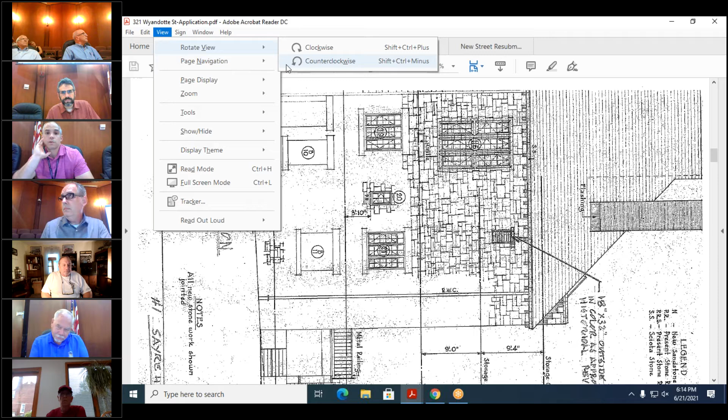Kelly, if you could switch to the architectural drawing. Here we see a drawing of that same location. The arrow points to an opening that does not exist; that is the proposed suggestion. If you notice, that's within the existing stone wall where there is currently no opening. I would request the applicant explore the possibility of locating the louver around the corner. You can see in this drawing, the north elevation, there's a window set around the corner on that same level.

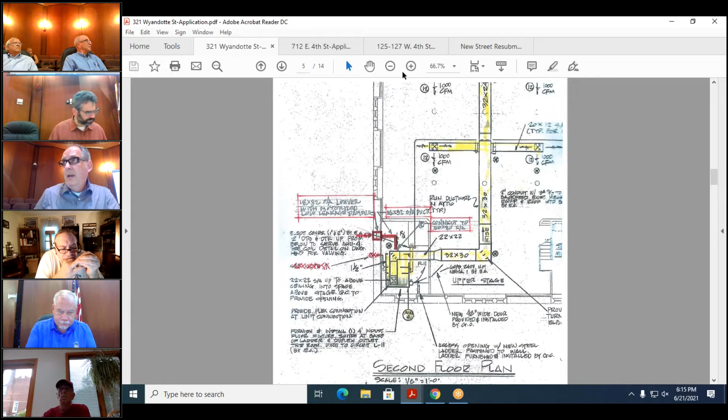Either up or down, Kelly, is the actual floor plan where we see the mechanical room. The yellow highlights the ductwork—I'm not sure if it's existing or new. The red indicates the proposed location of the vent. I'm suggesting that they could explore the window that's around the corner. I can't tell if the window is numbered, but there's a window opening on the other side of the mechanical room.

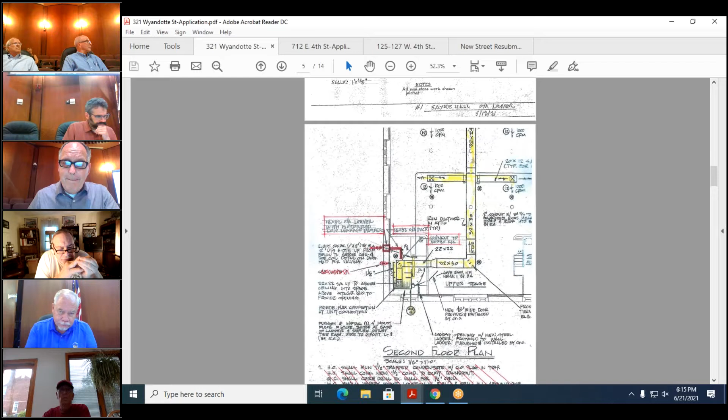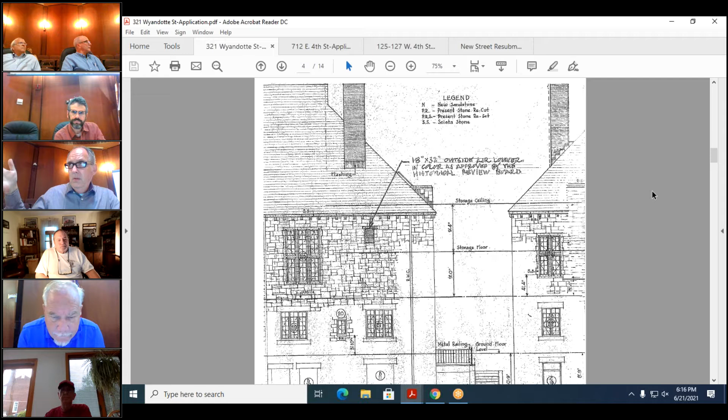Should HCC approve a motion in support of the louver at the location the applicant proposes, then in my opinion that needs to change from how it's currently indicated. Kelly, if you could go back to the previous drawing. The opening might be ideal for the mechanical room inside, but it's not ideal for the facade. So if HCC does accept a possible new opening, it would need to be centered in the window openings below. Right now it's maybe flush left, I'm not quite sure.

From the inside it'll be really difficult, but it'll also need to be aligned with the large window to the left. It'll need to have a sill and a lintel, and it'll have to be carefully integrated into that stone structure. That's my suggestion of an alternative around the corner, because I think the proposal, even when aligned as I describe, can be quite a challenge for even a skilled mason, since it would include other details as well.

That's less my concern. The concern again is the Secretary of Interior Standards 9 and 10, which state that you shouldn't do something that cannot be reversed. So the current proposal is to manipulate the existing transom, take out a portion of the transom, change that out for louvers. According to the Secretary of Standards, that's not reversible.

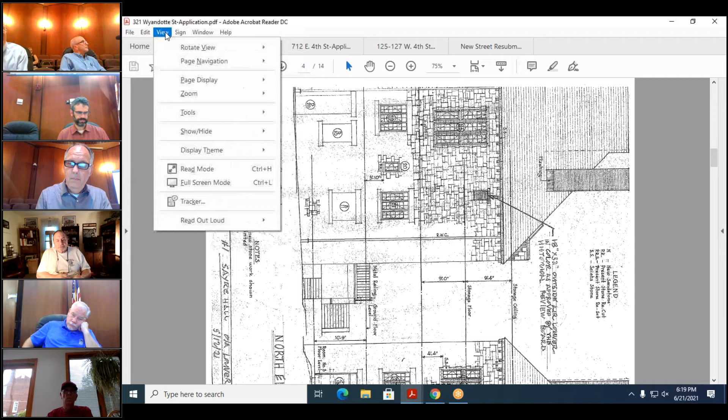As far as the Sayre Hall, to put the louvers in a window, the window sill is flush with the floor, and directly above the window are 3 electrical panels - a starter, a disconnect, and a control panel - that would have to be relocated. And the ductwork really has to be snaked around. So that becomes more costly than going through the east wall.

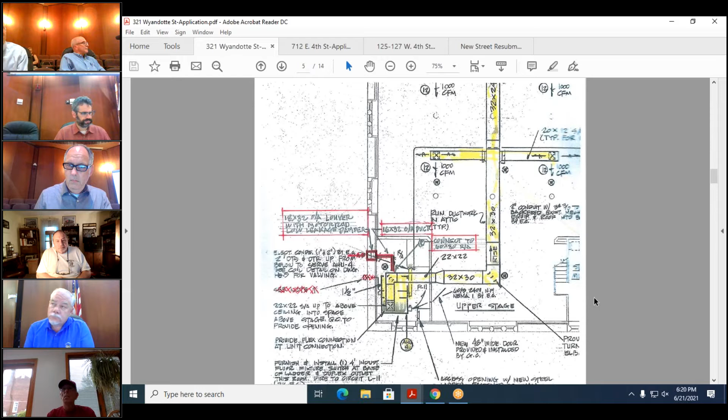Or let's say at least the same cost. Your suggestion, if we wanted to stay with the east wall, is to mimic the stone lintel and stone framework of the adjacent windows?

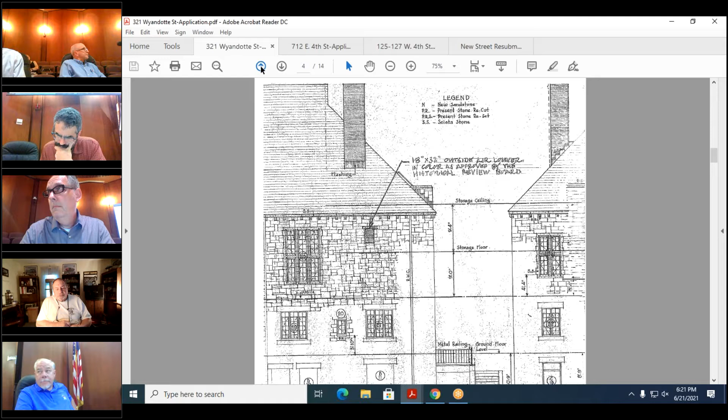I don't think it requires a full surround. It's just a small opening, but if you notice, some of the other windows have a sill and a lintel. The windows below, you can see they have a sill and a lintel. Okay, so if we would match that, are you saying that the top of the louver would have to match the header of the adjacent 3 windows, or

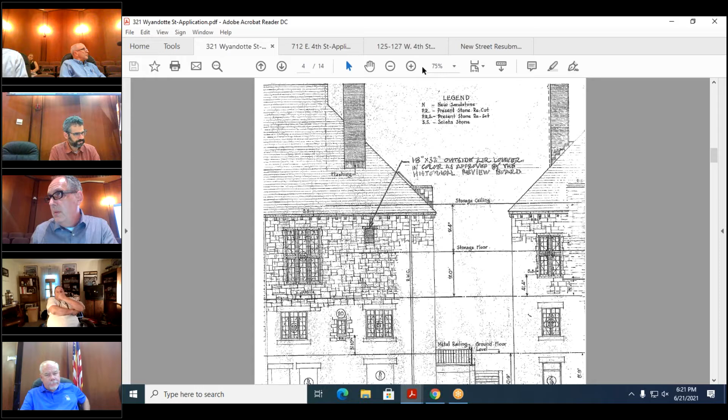does it have to match the sill of the upper windows? Well, it's indicated as needing to be high, so my assumption is you want it as high as possible. Correct. So yeah, the opening would need to align with the adjacent opening, and it would also need to be centered with the windows that are below it. So I can't read window numbers, but the window... so the 3 windows, you'd want it in the middle. Correct, yeah.

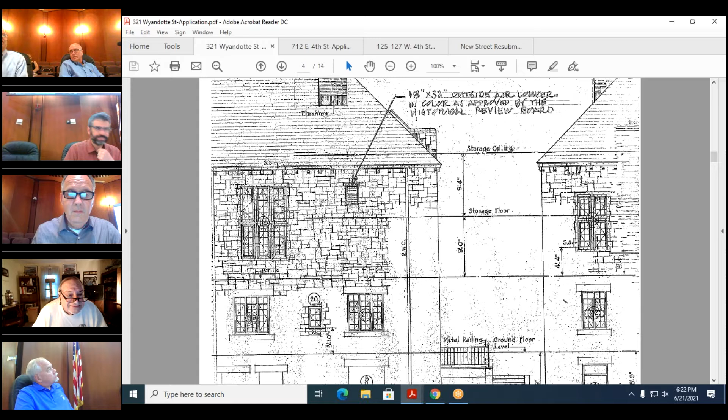Okay, and if you notice, Kelly, if you could scroll a little bit more, even the lower set of windows are aligned as well. So the circle, you'd want it lined up with the middle, center to center, right? Okay, that's my suggestion. The only thing would be the back of the air handler - I'd want to make sure that I can conform to moving it over.

What is the material that the louver is going to be made out of? Is it like a pre-finished paint? Well, right now there's a photo of the actual louver. And it's aluminum, but I will take that to a body shop and have it painted whatever color you people propose. Right now there's a louver in the back wall that's like an anodized brown finish. We can go with that color, but if you're saying you want a different color, I have no problem, because we're going to paint it. It doesn't really matter what color. I mean, in my opinion, I think it should just blend in and not really call much attention to it, right?

So what the thing is, when you say you want it to be stone, to me it's probably just going to be a grayish off-white, and I think probably everyone agrees you just want it to fade into the background and not call much attention to it, right? Now, I have color samples but unfortunately I didn't bring them. Do I submit them to you people to pick the color? Yeah, typically what we'll do is have Jeffrey stop out there and perhaps meet with you, Richard, right? I guess you'd be the contact, or both of you. Either one.

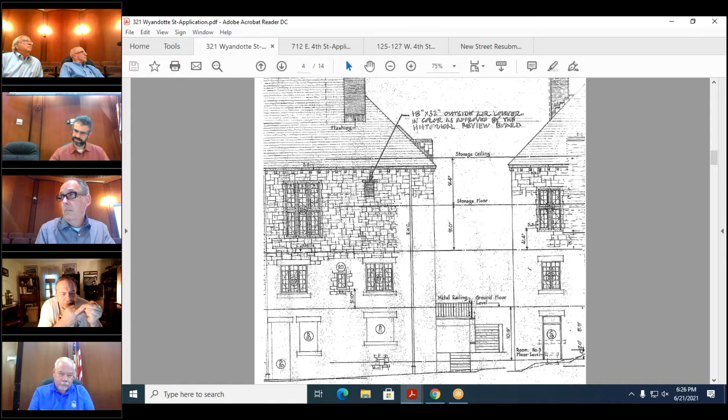I think if you could get that louver centered over window 21, with the same lintel, I think that would be adequate. I wouldn't be opposed, and I don't know how the rest of the board feels, but to approve that and then approve two options - either that option or the window option - almost give them a choice, because once they put this out for bid, we're really not going to know what to assume.

Cutting through this stone and adding lintels and stuff is probably going to be a little more expensive than putting in the wood. It's just, can they get it in the window? Right, correct. It really comes down to that. Okay, it's a good comment.

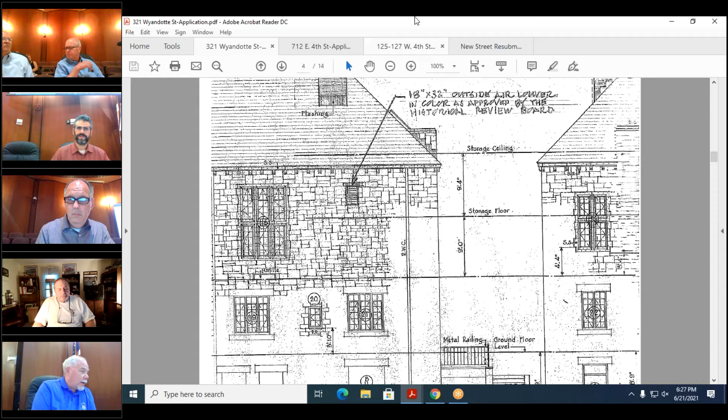Any other commission members wish to comment on this? If we don't have any other commission members who wish to comment, is there anyone from the public who wishes to comment on this?

If not, I'd like to make a motion for 321 Wyandotte Street, the Cathedral Church of the Nativity, that for the proposed louver at location number 1, at the second floor, we allow the church an option for two bids - one being the original proposed location in stonework with the louver being centered over the windows below.

Our historic officer will confirm paint color selection with the church in order to find something that helps it blend in with the stonework. There will be a cast stone lintel to provide for proper installation. The second option would be that the louver could be located in the existing window around the corner.

The second location, for the second louver at the basement level, my motion is to take into storage the existing transom, and the new louver would fill the opening of the entire existing transom.

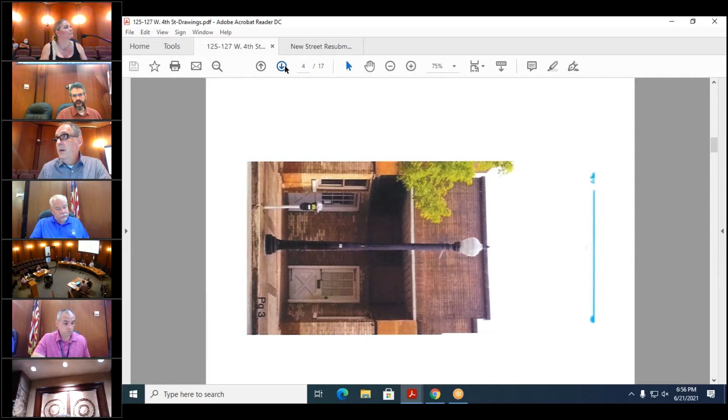The original proposal to repair the transoms and replace the missing glazing in the transoms, as I stated previously, is appropriate. Currently when you walk past it, you'll see the transoms are all covered in plywood, rightfully so, to protect them. If you scroll through the photographs, you'll see that when they removed the pent roof, they probably didn't find much of the transoms intact. Some look completely missing. In a previous photograph there appear to be remnants of what could have been leaded or block glass, but a lot of that is missing too. They probably quickly boarded those up so birds, wind, and other elements wouldn't come through, so I don't blame them for doing that.

There's a detail of a glass sample a bit further on. This isn't labeled, so my assumption is this is the proposal for what they want to do in the transom. Since it's covered, I don't know if this is a true match, an alternative, or a close match to what's there. So when we get to the discussion, we can talk about that too. I couldn't get to it when I was there.

The application makes no mention of the entrance doors. So Kelly, if we could go back to that, the first couple of images that show the whole facade.

Just as a reminder, until the wood and metal sheathing was removed, these were interior doors. So there were other doors between these and the facade. It was a flush facade. So what was interior is now exterior.

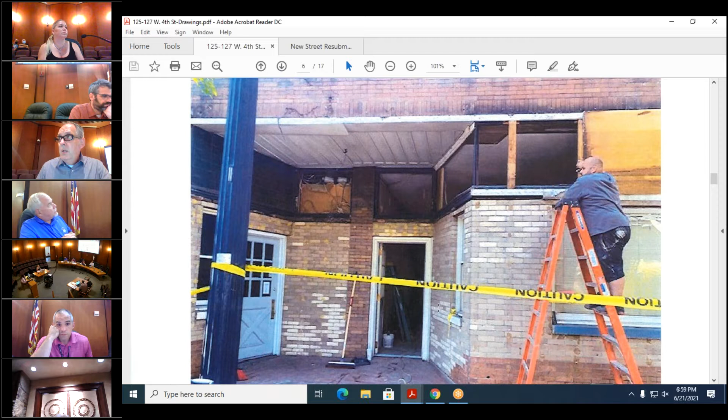That's vinyl. Vinyl, okay.

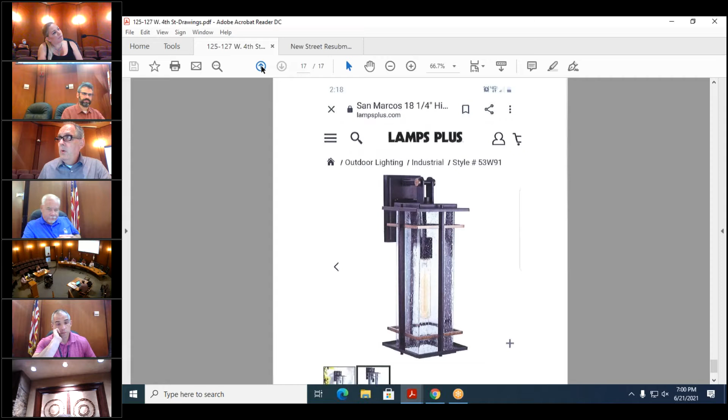And then finally, the current application, or the series of pictures, also includes depictions of gooseneck light fixtures. I think these are all toward the end, so these are not at the site—I think they're inspiration photos. There is a Craftsman-inspired metal outdoor wall sconce. That's the wall sconce. And then backtracking a couple, there's a retractable awning detail. But the locations for all of those I couldn't find anywhere on here, so that'll definitely require some clarification from the applicant.

I do want to say gooseneck fixtures have previously been determined as appropriate within the district. It's just we always make sure that because they're new to the building, there's no visible cables, conduits, or junction boxes—all of that would have to take place inside. We also limit the light temperature if these are LEDs, since LEDs can go from very warm white to very bright white. In the historic district we limit that to 3000 Kelvin. Those are readily available bulbs, not overly expensive, just not the blue-white lamps—they're the warmer, orangey kind. It'll say on the package 3000 Kelvin.

The guidelines don't mention outdoor lighting fixtures, so I don't have a lot to go on with the one wall sconce that she included. It was difficult from these drawings to know really where the sconce was going. I think that's more perhaps just a taste issue, so we can discuss that as well.

With awnings, we have approved awnings in the past. They should be canvas—the best one is Sunbrella because of the limitations on fading, etc. So no metallic or artificial kind of canvases, vinyls, or anything like that. It would need to be a true canvas, and those are weatherproof, over a metal frame. It looked like from the detail it had closed ends, and we don't allow the ends to be closed.

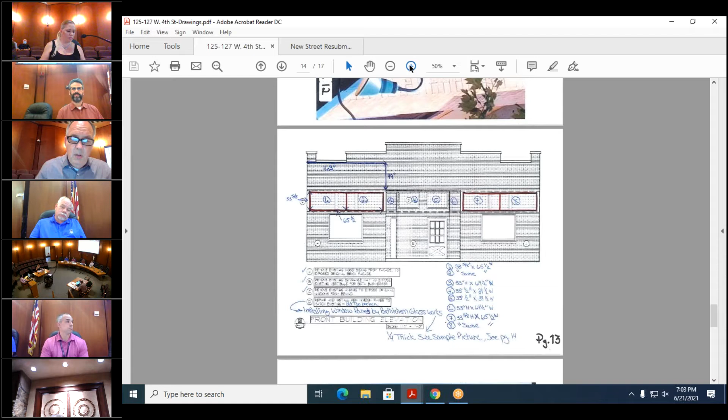Okay, thank you, Jeffrey. Well, Larissa, quite a lot of feedback, and maybe you could fill us in a bit more on the current plans, what you intend to do with the glass on the transoms and light fixtures and awnings, and what you'd like to do with the brick.

Let's start with the glass. For the windows, my goal in the beginning when we first met was to restore the windows that were there, but they seemed really damaged once we took everything off. So I got a hold of Bethlehem Glassworks and did the measurements.

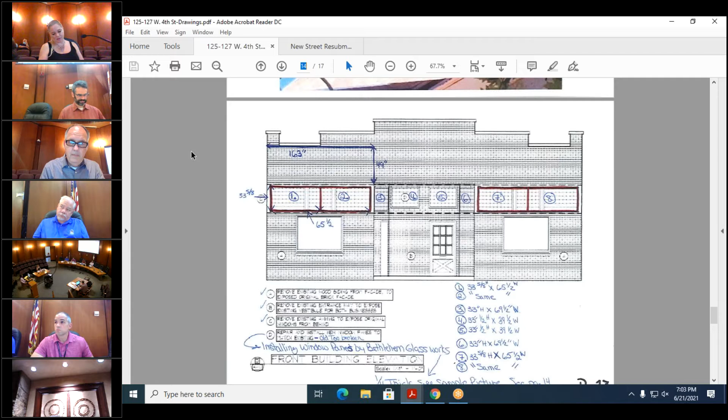There's an architect picture on page 13. I submitted that to him and gave him the measurements, and what I found out is, for example, the two front main glass panes that were there are structured into two panes. So I would just have to restructure that into two wooden frames. There isn't metal there, there's a structure beam that goes all the way across the building itself, holding up everything from 125 and 127.

So what he told me to do is just frame out an actual window measurement for the new window panes to go in. I brought a sample of the window I picked out — this is it right here, the one I was holding. So it wouldn't be in block form like it was, it would be one continuous piece for each opening, separated into two frames as you're seeing there — like one, two, and then the third goes in, and then three, four.

That's how it would look, because I didn't want something so transparent. I wanted something that would block the light, kind of like how they did back in the 20s and 30s, but I didn't want it colored. It looks like it was painted — they painted it green — so maybe they were blocking the light at one point since it was painted over on the old window.

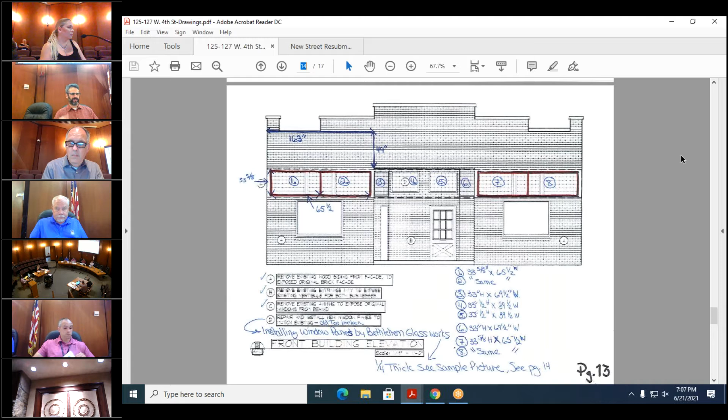Are you working with a contractor right now on this? Okay, I would just ask for pricing, because there's so much difference. It's clear that brick was infilled, and it's clear you used to have a much bigger opening there. So many of your neighbors have storefronts that size. I'm not saying you should do it no matter what, but maybe you just want to price it out and see what it does for you.

At the same time, you could also address some of the entrance doors and make it one system, where it's all aluminum storefront and aluminum entrance doors. That's really what's more typical for this kind of building and what you see along the street. Just something to consider and weigh into your budget and your long-term goals.

I think it'll be a huge impact on the building when the windows open up on the top, it's just gonna have a huge impact. It will, and it's gonna look beautiful. I actually like the glass you picked. I think the front doors are solid wood doors, so I don't think weather will affect that. I'm not a huge expert when it comes to interior versus exterior, but I think they're exterior doors.

Yeah, because the one has the old mail slot. They're still there. That's actually the old original door. I don't know when, but...

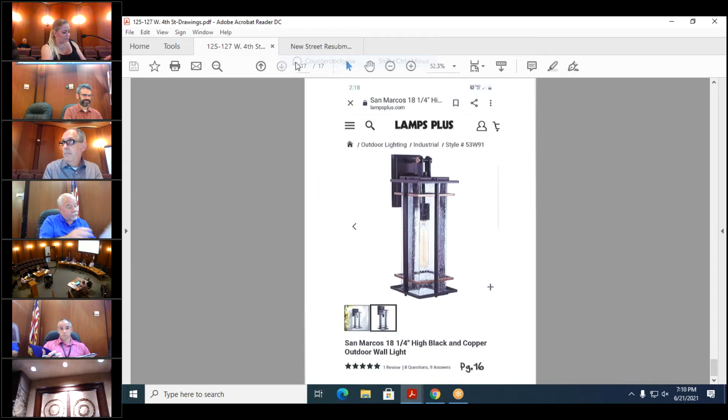I'm an image person, so I'm going by the colors of the brick. That middle brick pillar, if you're looking at both doors, you have that single darker brick pillar coming down. I wanted to put that light fixture there. So that would stand out, if that makes sense.

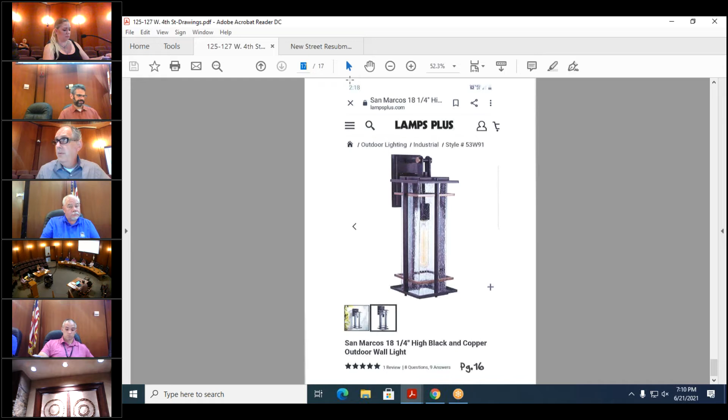That wasn't really clear to me. Could you, maybe Kelly, scroll to the drawing so we can see that? Thank you. If you go to, probably the best one, page 7. Right there. So that darker pillar of bricks, that's where I want to put that light fixture.

That would be a common light, which would be on a common electrical panel for me. That would be on all the time, dusk to dawn. And of course the brick is going to be... I know you suggested painting it.

Mike, I'm just trying to remember if there were any accessibility issues with a light fixture that size next to an entrance door. Trying to find the width of the light fixture as we speak. It's just going to be a height issue, not a width issue, so it'll have to meet the minimum standards for clearance.

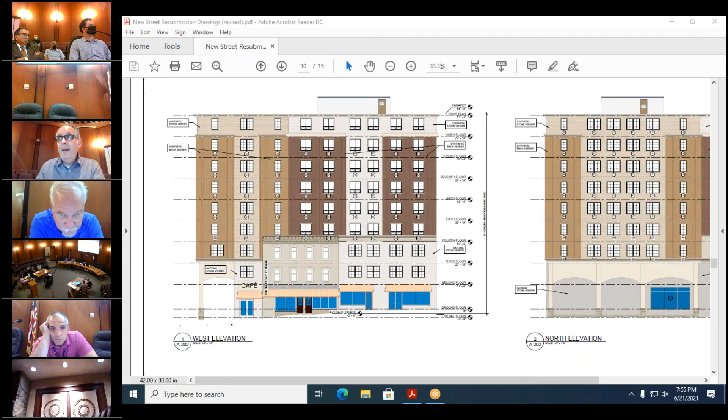Still, the way the lower facade is delineated from left to right, let's call it a pass-through or tunnel, then a cafe, then the existing building, then the replacement. That really gives a rhythm of 4 or even 5 structures. When you go up above, that rhythm is broken. It doesn't really repeat. I'm not saying it has to be consistent, and it is getting a lot closer to something appropriate from what we've seen, but I do think it could use a bit more exploration.

Sorry Jeffrey, can you repeat how you see the rhythm of this? I said I'm starting to see, in the previous iterations there was no alignment of any of the existing windows of the Italianate building. I'm starting to see some kind of alignments forming. I'm not saying they are truly aligned, but some windows are beginning to align with at least one of the two, not all of them. Overall, the rhythm established on the street level is definitely not repeated upper, so it's getting closer in a lot of ways, but there still seems to be quite a disconnect between the street level and the upper floors.

And what did you say, something split into 4 or 5? If you read the street level, we have a delineation, say from the tunnel or pass-through, call that one thing. Then you have the cafe at street level, another, and above that the facade does kind of repeat those delineations. But as you move to the right, the street level has yet another delineation that isn't repeated above. Similarly, the final right portion on the street level has a delineation not repeated above again. So it starts to connect street level to above, and then that breaks down. But I'm sure they have certain logic behind it - when we get to the discussion they might describe that. It is getting closer compared to previous iterations of alignment, but based on the guidelines, there is still a disconnect between the street level and the upper portions.

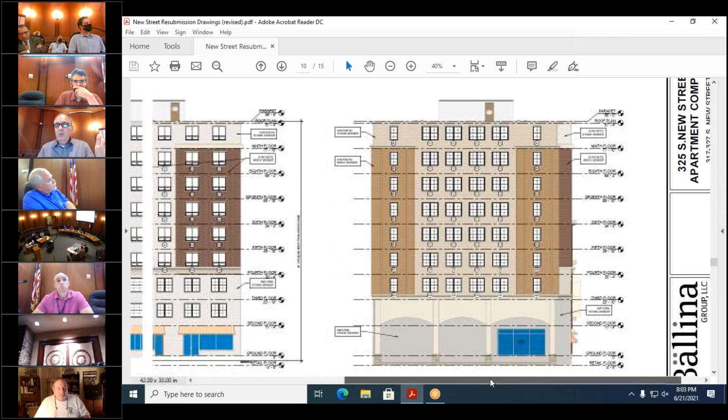So again, Gary, if we could structure the meeting: demolition and size and scale, and then if we have time still, we can get into the specifics of design. In the past, we didn't get into too many specifics because there was a motion put forth for denial. So that's why we haven't really been able to massage too much in reference to those architectural details.

Well, thank you, Jordan, for joining us again, and thank you for all the efforts you've been making. Would you be able to comment, starting from the points that Jeffrey mentioned, perhaps in an overview? Again, we're focused on the request for demolition of these 4 structures, and then we'd like to, of course, talk about the size and scale of the new proposal.

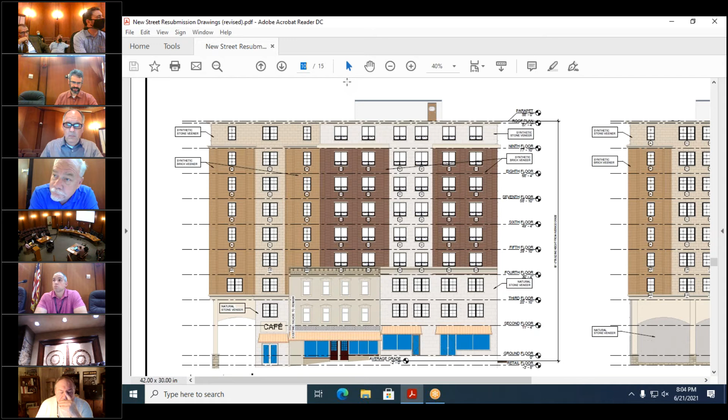So go ahead. So our case for the demolition hasn't really wavered much since we started coming here in January. We believe the buildings are past their lifespan. We do plan on integrating that existing facade as discussed and as mentioned by Jeffrey, so we have not changed on that. The other buildings, for the reasons cited, we feel should be demolished in favor of the project. One thing we want to point out is the project now matches the heights of the buildings across the street, so they are in line with existing previously approved structures.

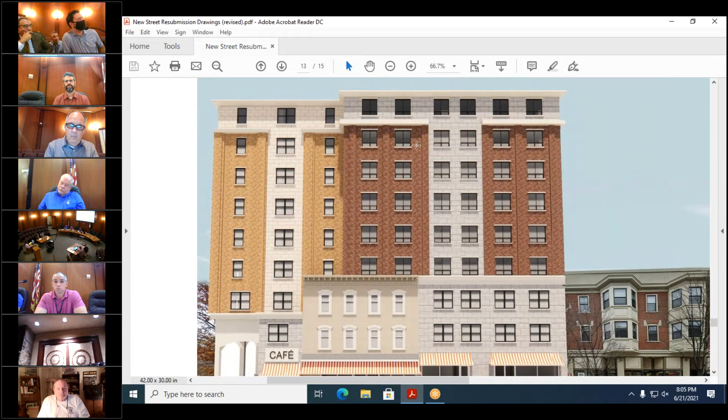That's really it. What we did, we reduced the building height yet again. We removed the rooftop terrace in favor of squaring off the building to minimize unit loss, with another reduction in building size.

Can you talk a little bit more about the remaining building that you've integrated? I believe that's 321, 323. Can you talk about what you expect to do to maintain that facade? Yeah, we expect to maintain the front facade, anchoring it to the new structure behind.

How? We have not finalized that yet because we don't know if we can do the project, but we will have our structural engineers investigating to determine the best course forward. It has been done before, we know that we're not the first people to attempt it.

I see the floor plans look like, for the units, they've incorporated the existing window locations too. Is that right? Yes. Are you expecting to use the existing windows too? If we can, yes, we would like to, but if they had to be satisfied with a replacement, that's another discussion. We just haven't been able to further evaluate if they're operable or serviceable at this time.

I think that's probably one of the things we'd all like to get a better sense of—the kind of work you're expecting, how much can you really preserve of that facade, and what's going to be involved in it. Is it going to be one of those things where, oops, the whole thing just fell down because we couldn't help it? That's how it goes.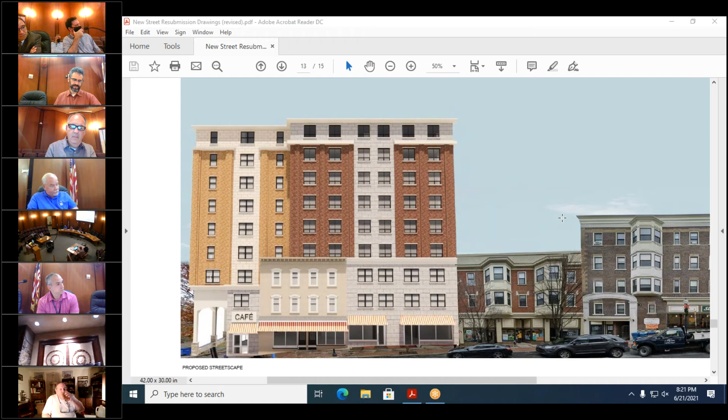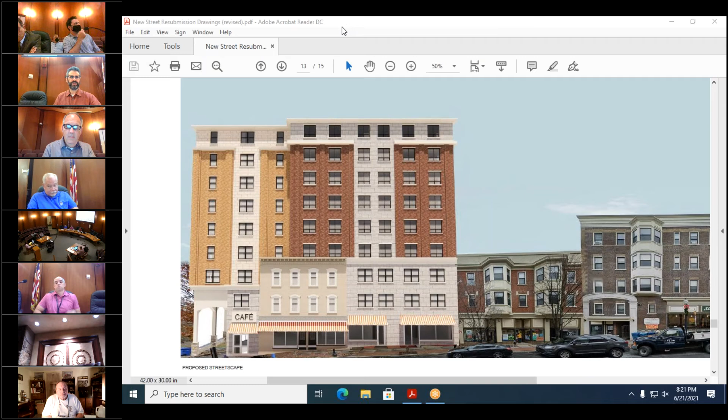So having said all that, is it okay if we open this up, I think there are probably members of the public out there who want to speak now too. Is it okay if we open this up to the public at this point? Okay, so I know there are members of the public who want to comment on this project. If there are, please announce yourself.

Hi, Gary, this is Beth Starbuck. Oh hi, Beth, thank you for joining us.

As many of you know, until recently I was a member of the HCC, but I was not reappointed to the commission. So after 21 years of serving on the commission, I'm for the first time addressing you tonight in the public comment portion of the meeting.

Of course, the height is an issue and has been discussed many times. I would just urge the members of the commission to look at our own guidelines that Bethlehem bought and paid for, that shows pictures of buildings sitting next to each other, a row of three buildings with three-story buildings with a two-story building in between, and an X on the two-story building. So our guidelines say we shouldn't even vary building height from building to building by 1 story.

And here we're adding how many stories? 6 onto what is typical for the area. So I still think that's a major concern, and I think it's a mistake. I think the whole idea of wanting taller buildings is not necessary, and there would be plenty of development that could be shorter and appropriate for the district and still be profitable.